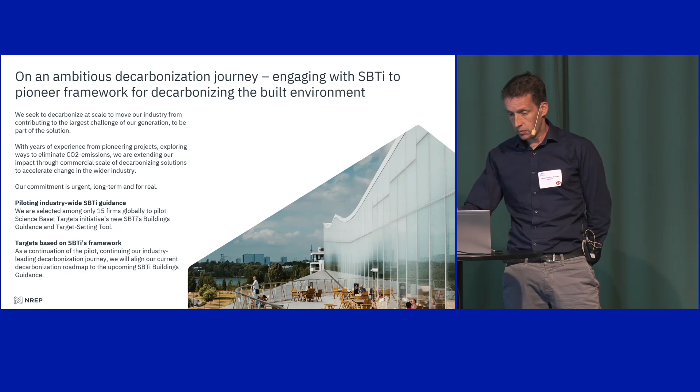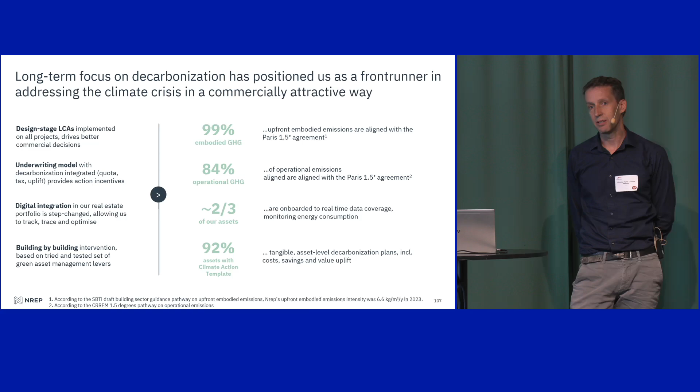We are very ambitious on the decarbonization journey. It's a big thing for the company to be part of decarbonizing the industry and the built environment. We have already set targets for decarbonization of our portfolio, also for where we want to go in the future. We've had a long-term focus on this and done a lot of work, and are still doing a lot of work, to gather data across our portfolio and get insights on how our buildings are being operated and how our development projects are progressing on meeting our targets. That's an ongoing struggle for us to get data across all countries. As you realize, the regulations and legislation across the countries differ a lot, so we're also facing issues in getting all our countries and markets to operate in the same direction - speaking, for example, of doing LCAs.

So where are we on the decarbonization path? We have addressed this - earlier this year we disclosed our first GHG report, going more into detail on where we are going, and we highlighted that most of our emissions are actually coming from the construction of the projects that we are doing. That's a huge challenge for us, and we will continue this work, but it also continues the discussions here that we need to do a lot more in the future - we need to lower the bar and have more work to do on that. So Marcus, that will lead us to some of the challenges that we have when we operate this.

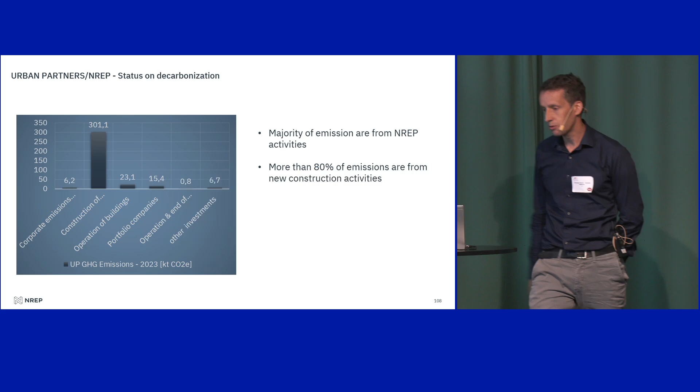Thanks. So some of the challenges we are facing are very similar to the ones we have heard before. I think the analysis done on the Nordic level aligns with our opinion. This is a Sweco report showing the difference using different methodology across Sweden, Finland, Denmark - the outcome from the same building compared. So we're challenged by not being able to compare results across borders.

We might also draw the wrong conclusions and have the wrong solutions based on wrong data. We are also forced to use local consultants who understand the local methodology, and this results in some loss of transparency. We think also higher cost and less efficiency.

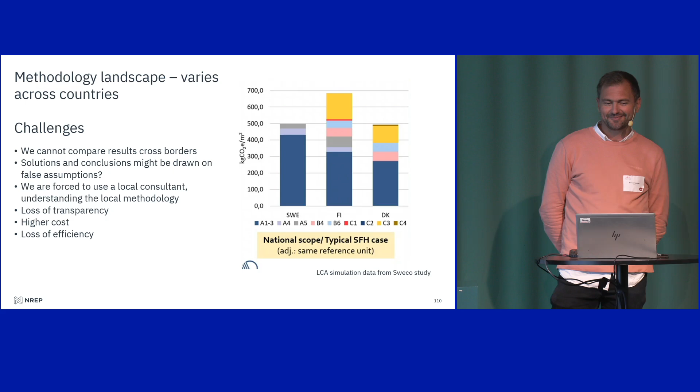So the variables have been mentioned before - we see the same area definitions, building parts included, biogenic CO2, how to calculate that, EPD type, generic versus specific, and also constant EPD improvements among the suppliers. So we need to keep up with fetching the latest EPDs.

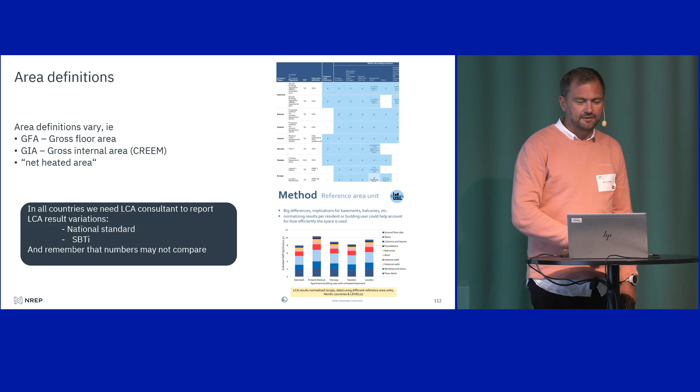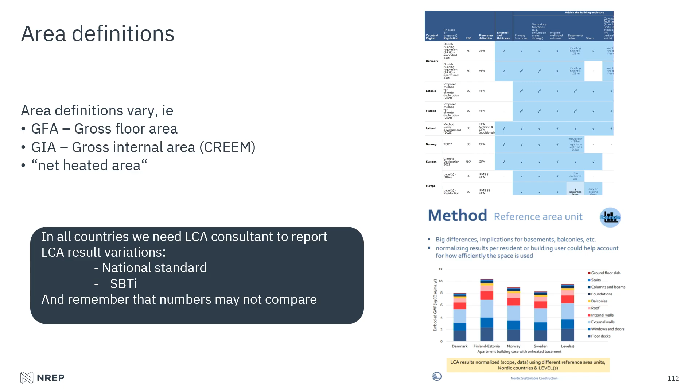Biogenic CO2 we think is quite tricky as well. We hear some countries discussing introducing factors for how to calculate biogenic carbon. Is it a correct assumption to think that all wood is burnt at end of life, or is actually some wood recycled?

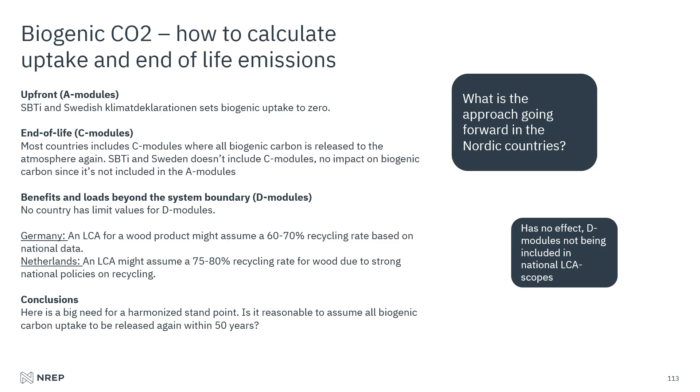I think also to mention the D modules that actually handle the recycling potential - it's not used in any country that we know of. So if it's not in the scope, there will be no drive on this recycling question, we think.

We ask them to redo it and we can supply a list of preferred suppliers that we would like to see in the calculation. But it's like comparing it to a cost calculation - to do a cost calculation for a project on generic data has no value for us. It's the same thing here.

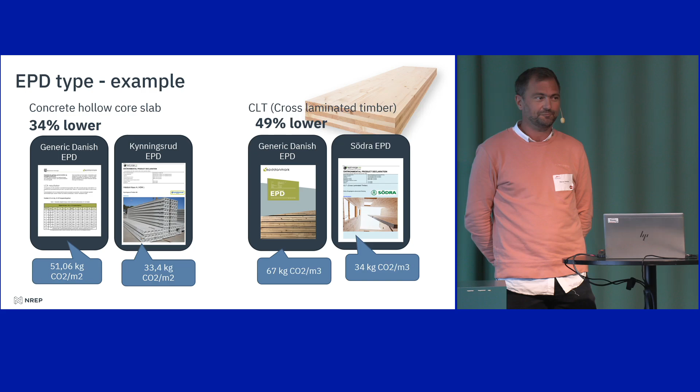And this constant EPD improvement, it's something we call market decarbonization. So even if we are expected to do different things, we need to think maybe more hybrid solutions, but we are also very sure that our suppliers will decarbonize, meaning we will have a market decarbonization without us doing anything.

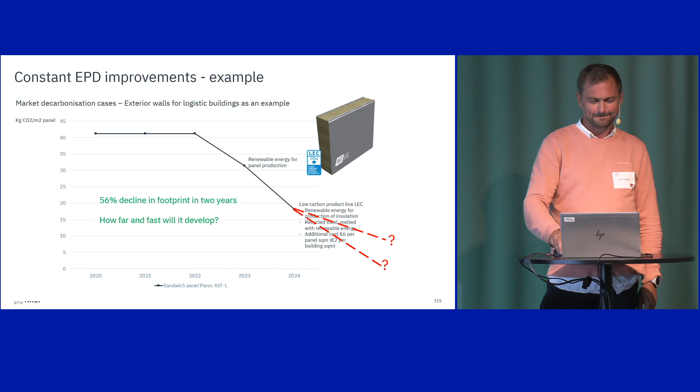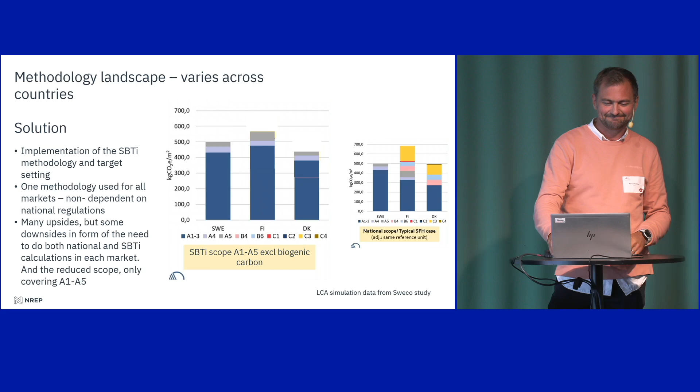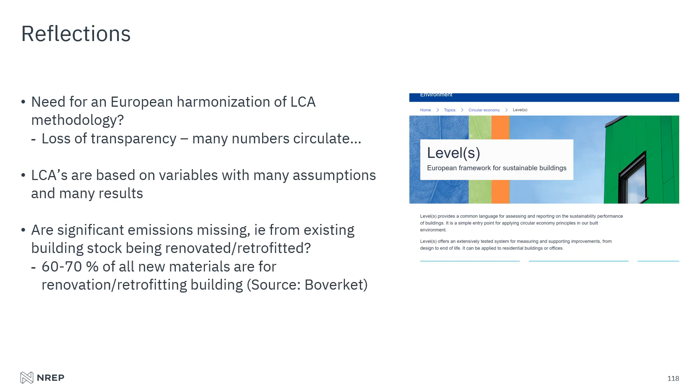But the question for us is then, is that sharp enough to actually drive us where we want to go? We promise our investors to be the leading company in this area.

LCAs are based on variables, many assumptions, many different figures. So in our organization, we face people from Finland and Denmark talking about kilos and having completely different scopes, but they still think it's comparable.

We also, of course, could see that we do a lot of renovations. From the statistics, we can see that 60 to 70% of all material that is produced goes into renovation, and this is out of scope. So we are focusing a lot on new construction of new buildings, but maybe missing out on a very big chunk.

I think that was the last one? I think so, yes. Do you want to add something, Christian? No, it's just a quick comment.

It's very important to realize, as we try when we speak to our colleagues about LCAs and how the methodologies are, that an LCA is based on something like a weather forecast. You can do a weather forecast in many ways, and if you don't like one forecast, you could look at another one. Every day is where we are, and we need to put a big push on this. We also need to harmonize on this, and that's one of our concerns, that we are running in many directions and we can't really compare apples with apples.

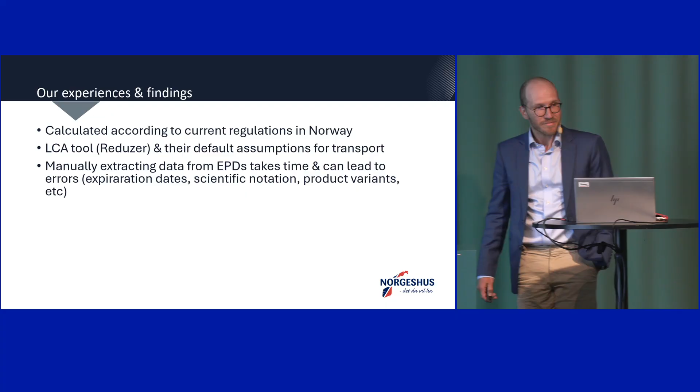Some general experiences from this: it takes time and it can lead to errors. I've been trained in understanding the difference between the various greenhouse global warming potential indicators, but some of my engineer colleagues haven't. As soon as they're confronted with GWP GHG versus GWP fossil versus GWP total, we might as well be speaking Greek. So those are some things to make note of.

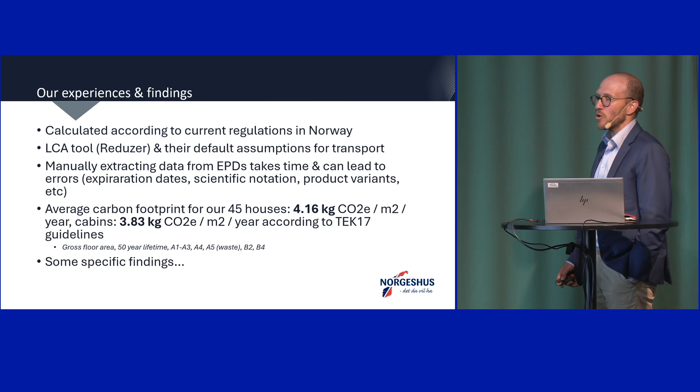A little bit more about some specific findings. But before I go further, one thing about EPDs. There's been good discussion about EPDs, and I agree with NREP and Marcus—we want to use product-specific EPDs to the greatest extent possible.

In these calculations there are about 23,000 different product lines, of which only about 300 are unique products. Among the 23,000 product lines, we had EPDs for about 85%, with 15% generic values. But for individual unique products, which can be used several times, we had about a 65% coverage ratio for EPDs and 35% generic values. Many of these generic values came from the Boverket database.

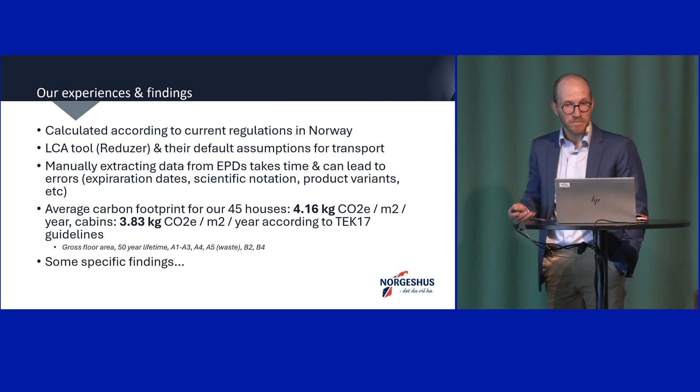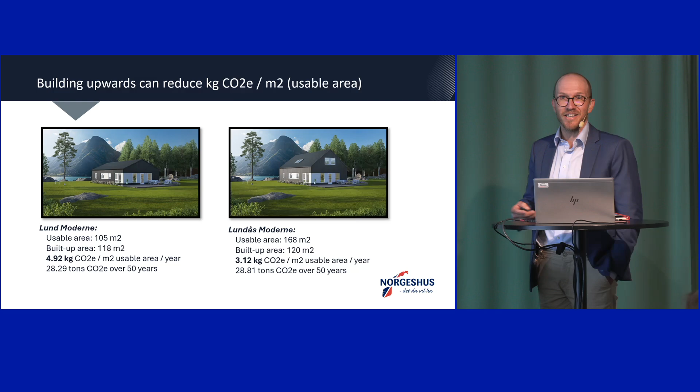Another finding, another model—this has to do with cement again. Here's a model called Fauna, a much smaller house. The usable area is about 70 square meters, built-up area 77 square meters.

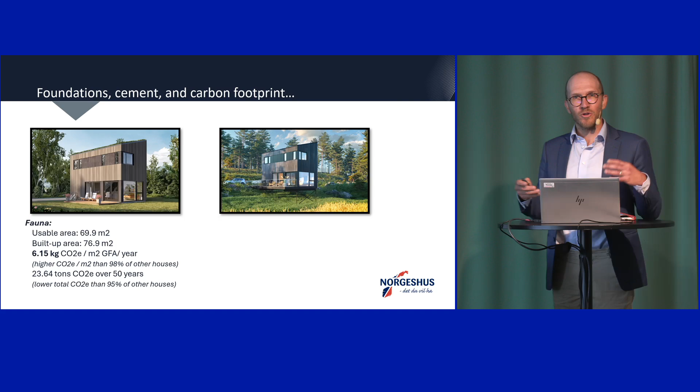This is very interesting. If you look at the total kilograms of CO2 per square meter gross floor area, it comes in a little over 6. When I compare that with the 44 other models in our catalog, it's actually quite high—higher than 98% of the other models. So if I'm a consumer, I'm thinking, this is a 'miljøversting'—in English, this is not a good choice, not an environmentally friendly choice.

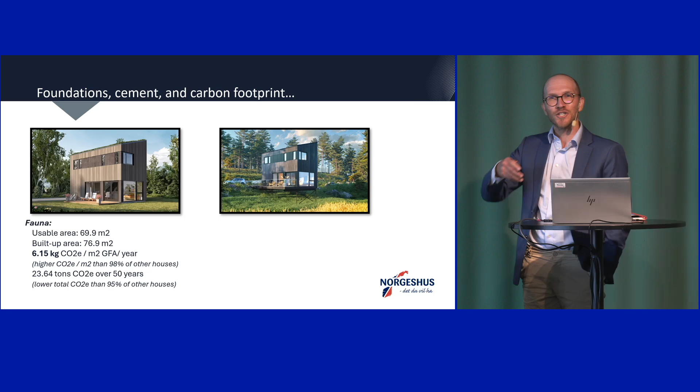But at the same time, if you look at the total footprint, it's about 23 tons of carbon dioxide, which is lower than 95% of the other houses. I thought that was interesting. Then when you look at the same model designed with steel pier foundations instead of concrete, the total carbon footprint goes down across both metrics—per square meter and total tons.

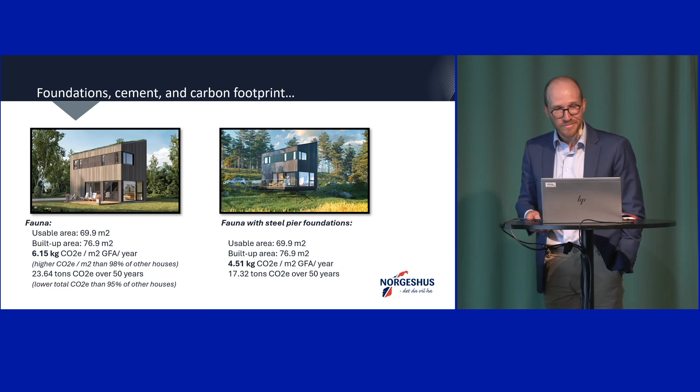So what are the implications? The first thing I want to say—these are my views, and to an extent represent the views of Norgeshus AS, not necessarily the 150 contractors I interact with daily, but some of what I'm going to talk about comes from my experiences interacting with them.

First, obstacles: there is a great amount of inexperience with carbon numbers and what they mean. Even if you ask me, it's like, Ben, can you put into context what 6 kilograms per square meter per year means? Yeah, I might talk about how many flights that is, round trip from here to Trondheim, but still, it's new for many people.

I'll go into it a bit more, but I think the work with, I don't know whether it's 7.2 or 7.5, with some of the coming delegated acts to put these numbers in context of national plans and national goals toward neutrality, will help people understand.

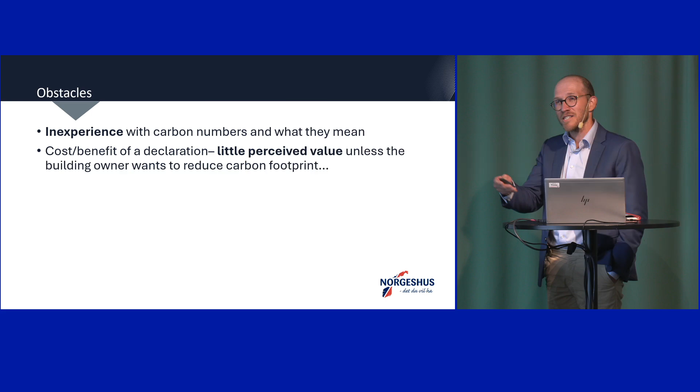Cost benefit of a declaration—there's little perceived value unless you have a building owner who wants to reduce the carbon footprint. For a lot of contractors I speak with, this is just another cost they have to deal with. But if you have an owner who really cares and wants to make better choices, it could be valuable. It's not currently a requirement for all buildings. Our case is a bit different—we wanted to be ahead.

We have the resources to have someone like me look at this stuff. Not everyone does. And then there's biogenic carbon - in Norway we have to do this instantaneous oxidation of biogenic carbon. It leads to a lot of confusion very quickly.

I often see it from certain producers of building supplies - they make certain claims. Often if they have a wood-based product, I'll deal with a contractor, and someone will say, what's a wood-based product? This must have the lowest carbon footprint. But according to how we have to relate to the rules and requirements, that's not the case. There are cases of products in the market that are not wood-based that have a lower carbon footprint due to high recycled content as raw materials.

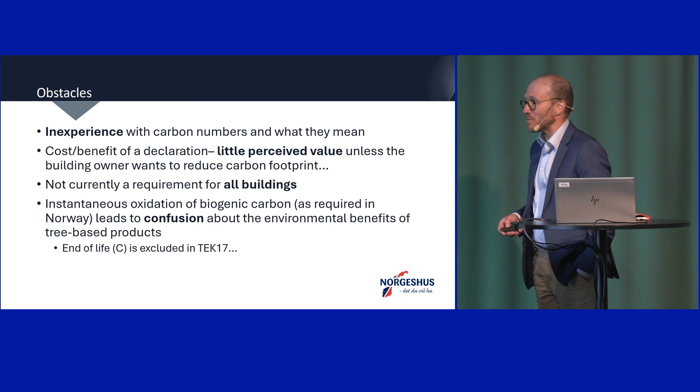What can we do to make it easier for developers and others? I think there's been a lot of effort here, but we need clear nonpartisan signals and commitments about future regulatory requirements so we could plan.

There's been a lot of good work done in this area, a lot of reports through the Nordic Climate Construction Forum Network. So a lot of what I'm going to say, they're not just my thoughts - other really smart people in this room have studied these issues and recommended things. One of these is looking at a bottom-up approach for building stock monitoring. I'm a proponent of that approach when it comes to setting threshold levels. You could read about that in the report, Decarbonization of the Building Stock.

A national database to submit climate declarations in machine-readable format - I think this is necessary to monitor progress over time. And once limit values are in place, I think reporting early in the project planning is important. In Norway, it's just to get the certificate of completion.

But if you have someone that's never dealt with this before and they get a building permit, and along the way they come to us and say, hey, can you guys do a climate declaration, like the building's done in two weeks - when we find out actually it's over the limit, that's kind of a problem. So I saw this idea suggested, and I think it's smart: have it also in an earlier phase, in addition to as-built.

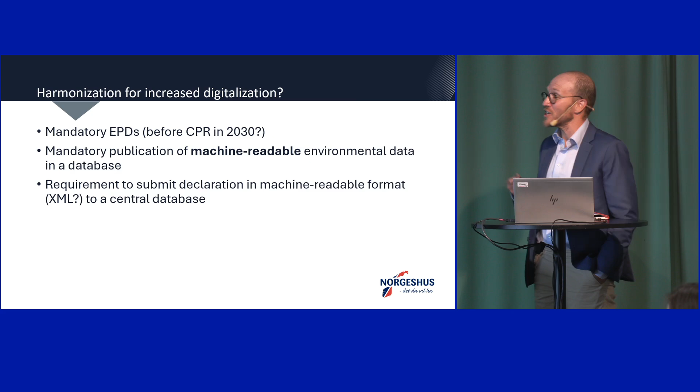And then standardized machine-readable EPDs - harmonization. I'm almost done here. Mandatory EPDs will help for increased digitalization. I'm not totally into the CPR, but if there is some sort of requirement that these EPDs are machine readable, so you don't have people like me reading the PDFs and making a mistake, that's a good thing to do.

A requirement to submit a declaration in a machine readable format, I hope that would be given with a database. And what should be the focus of harmonization? Biogenic carbon and how it influences the results - it's a big deal. The GWP indicator should be harmonized, but it depends upon what we do with biogenic carbon. I'm kind of of the view just to do that so-called zero-zero approach, to make things a lot simpler.

A uniform conservative methodology if you're using generic data - 25%. And that's because I think we need to incentivize building producers to produce product-specific EPDs. Ideally, they should be competing upon the values within their EPDs.

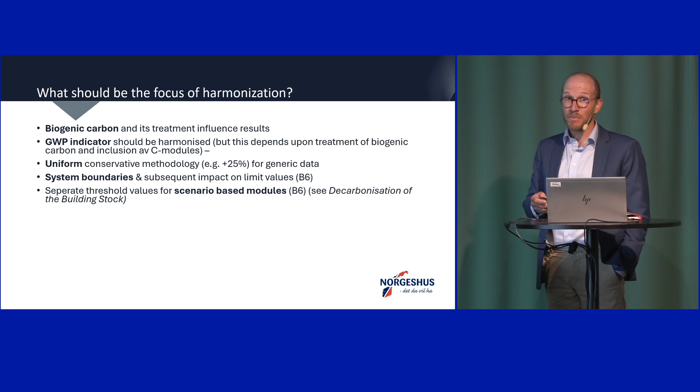System boundaries, very important - we should harmonize on this. B6 is a big deal, it influences the results significantly. A separate threshold was another idea I heard in a webinar a few days ago, for where you have scenario-based modules like B6 - they're scenario-based, you can use different emissions factors on scenarios. Maybe there should be separate threshold values for those, unless there is a standard scenario that everyone has to operate under.

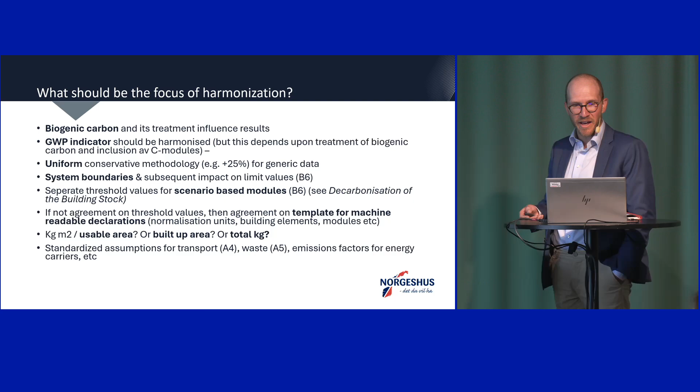If we can't agree upon threshold values, then a template for machine-readable declarations - so over time we can begin to compare stuff as regulations change. And then a bigger question: what's more important here, is it kilograms per usable area, or is the total kilograms something to think about in the broader context of the goals we have? And then standardized assumptions for transport, waste, etcetera, all to help harmonize and enable apples-to-apples comparisons.

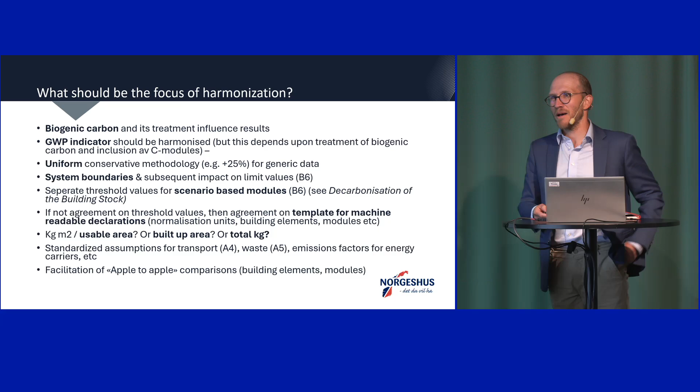Yeah, that's what I had.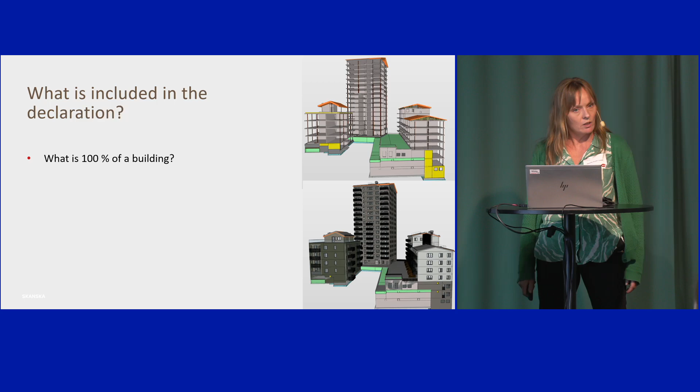So what's included in the declaration? If we say 100% of a building should be included, is it A-model, 100% of the A model? Is it 100% of the construction model? Or is it 100% of the load-bearing structural parts? Do you think we get the same results here?

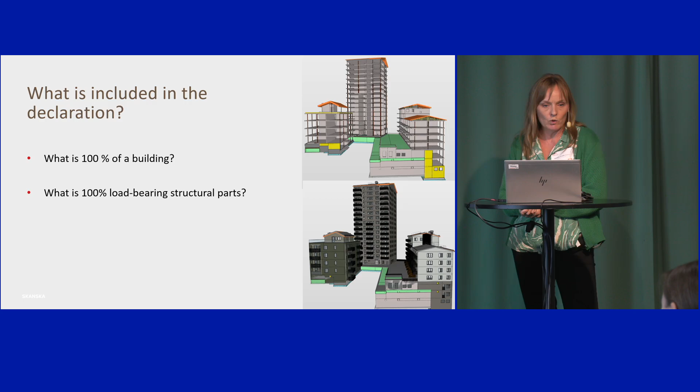And we have to then try to describe what's 100% of the load-bearing structural part, because that's something we have to declare in the climate declaration. And then it comes to, if we have 1 square meter of HDF here, that's the structure part, you know.

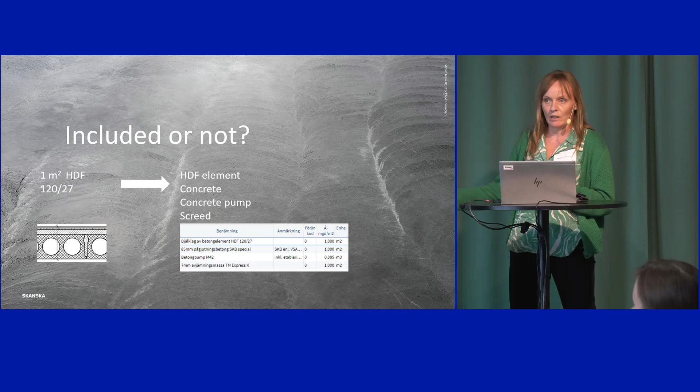And that 1 square meter, you can take it from a model, a quantity takeoff, you have 1 square meter. But if you actually calculate the materials that you need to have the function of this HDF, then you have a lot more materials. You have the concrete, for example. Should this be included or not? I think there are so many details in this.

So you really have to be very, very sure what's the data that you put into the calculation programs. This is just an example. We have a lot of questions, and I think Boverket has done a great job with this handbook that Christina showed. But when you really want to compare, you have to make sure that you have the same input. And that's the real challenge, I think, because it's a lot of data that we have to control and to be able to agree on.

And for Skanska, we have connected this from the cost calculation program. We calculate each and every material that we have to pay for. And we don't pay for just the HDF, we pay for the whole thing, otherwise we can't build the building.

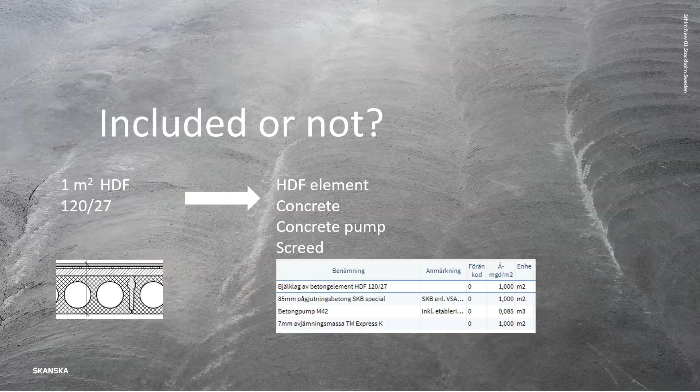And we also do the as-built, because we're not interested in what we actually plan to do, we're interested in the results. I can't see it in any other way. But we do know that there are a lot of changes during the building process and during production, and we have to keep track of all these changes to actually represent the as-built amounts of materials.

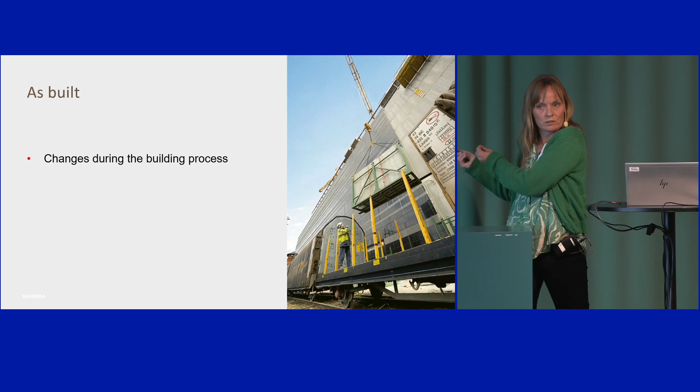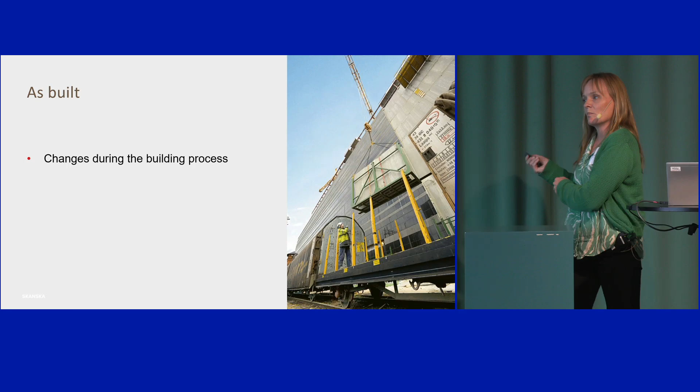And that is not very easy. You think, great, that you know exactly what you used. We follow the costs, we're great at following the costs, but to follow the changes in materials is not always that easy.

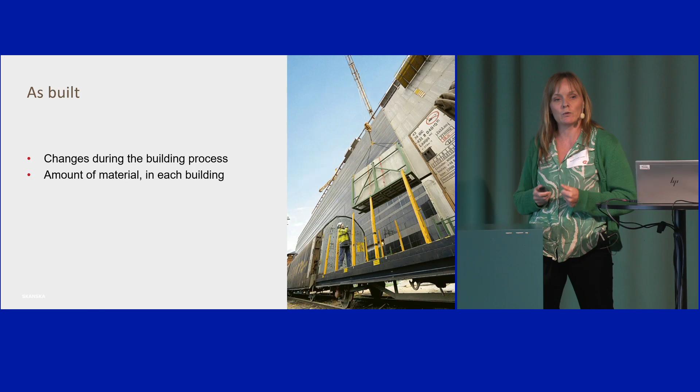We also have to keep track of how much materials we've actually used in a specific building. We might build a big project, maybe 5 buildings, but we do a climate declaration for each building, so we have to keep track of which material belongs to which building, in which building part.

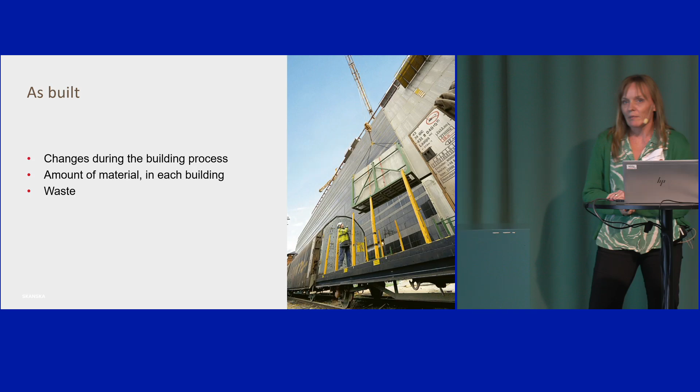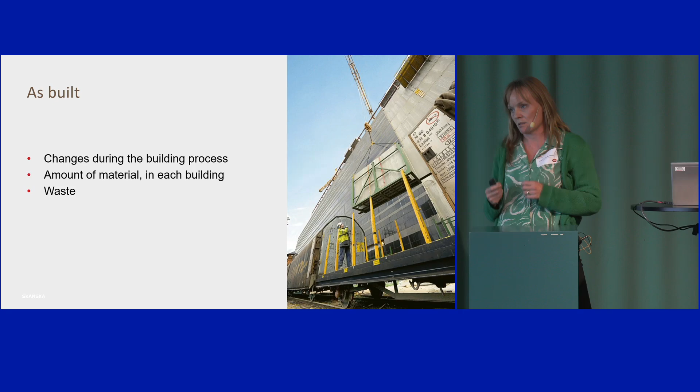Waste. When it comes to waste, we don't measure waste for a specific building part, we measure waste in fractions. You don't have a container for waste for a specific building part, so we can't measure waste per building part. That's not possible.

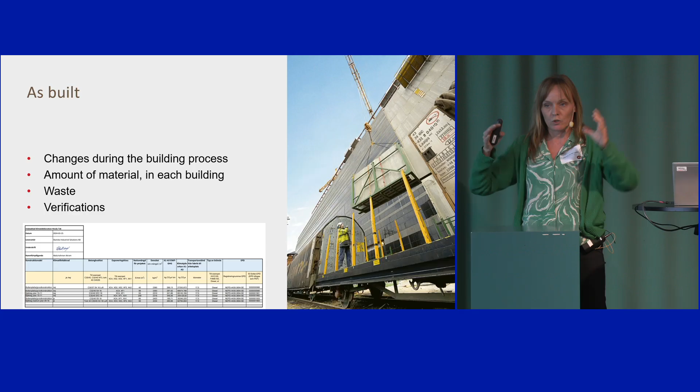And we also have these verifications. We have to have verification on how much materials we actually used. And I think this is great, because we do need to know what kind of materials we bought. But right now, there's a lot of manual work. It's time consuming, I just want you to respect that it's time consuming.

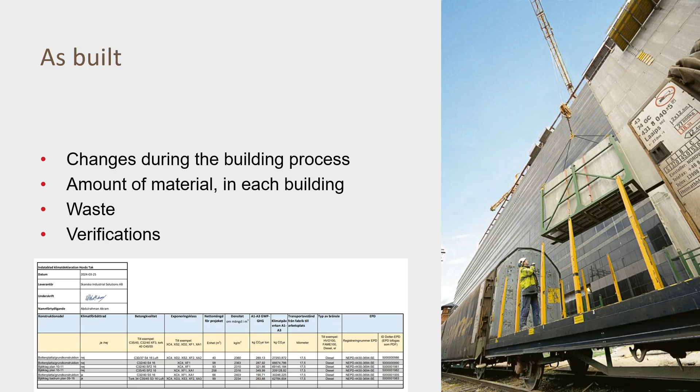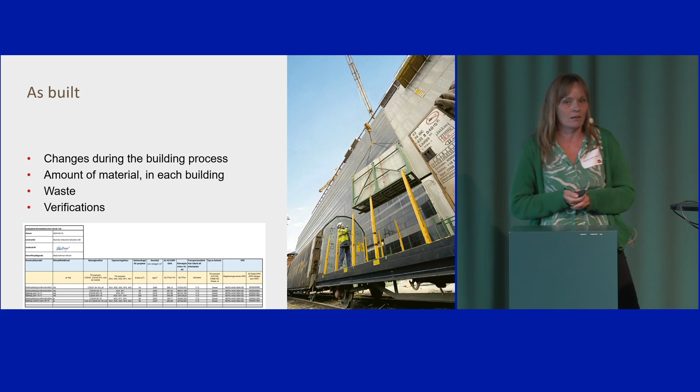It's a lot of data to get this right, and I want you to keep that in mind when you start comparing the figures from Boverket, for example, the statistics for the Swedish climate declaration that Christina presented. To me, that's okay, that's a start, but you shouldn't draw any conclusions from this material yet, because I don't think we've agreed on everything yet. There is a need for competence, of course.

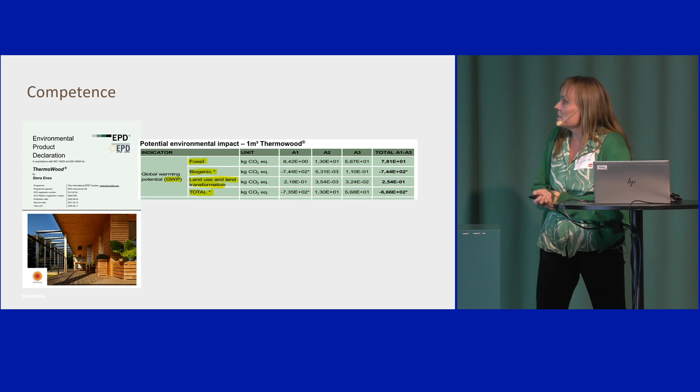We've spoken about the EPDs, and we put this in the hands of our purchasers. You should decide now which supplier you should use, and you really have to know which data you should use here. And they are lost—there are so many mistakes made here. We have to make it easier for them, because we can't have a specialist in each and every decision. So it has to be very clear what the data is here, because the results can be completely different values.

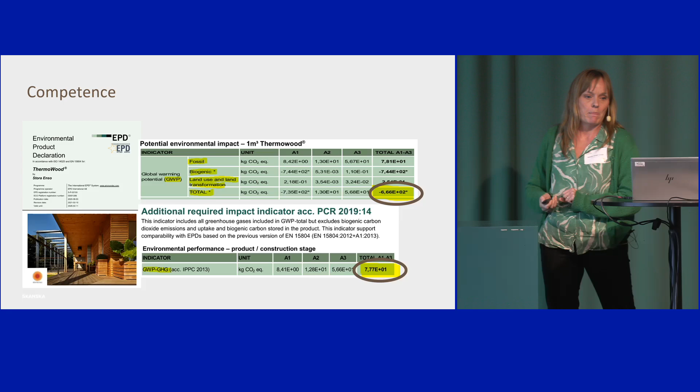But with that said, I think this climate declaration has put climate on everyone's agenda now. It's mandatory, and that's great. And there are some opportunities here, because there are a lot of opportunities.

Digitalization—because we have so much information that we have to gather, we really need the digitalization. And there's a lot of work within our businesses, cooperation to solve this for us in an efficient way. Standardization is really a driving force in digitalization. And that's needed not only for the climate declaration, it's needed for many other reasons. That's why it's a win-win for us. When we work with the climate declaration, we get a lot of other information at the same time, which we actually want. So for us, it's just a driving force.

So there are lots of opportunities here, and new cooperations, which we think is great, because no one can solve this by themselves.

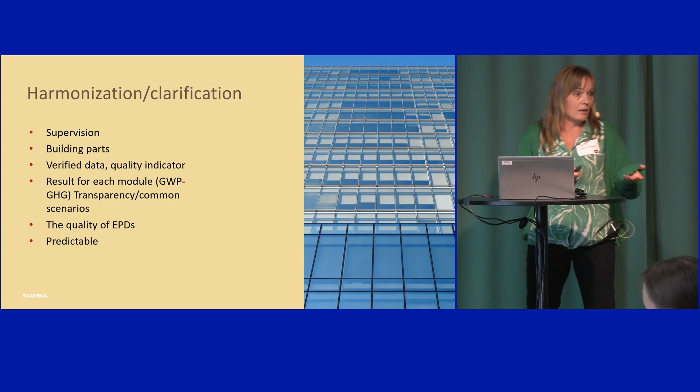And also, it has to be predictable—the roadmaps for developing the regulation—because change in our companies takes a lot of time. Everyone wants to change, but there's a lot of different information we have to connect to each other. The digitalization process takes a lot of investment and time, so you have to respect that, I think.

And you haven't given me the sign yet. Yeah, you did—sorry. Because that's all for me.

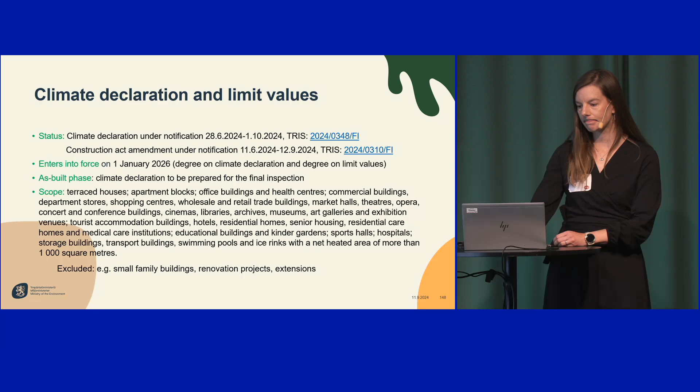What is in the climate declaration? In Finland we have included two separate topics or calculation themes: carbon footprint and carbon handprint. Somebody mentioned module D - this is not really module D in the life cycle assessment calculation, but you can take that as inspiration for our carbon handprint.

In our life cycle assessment, we calculate the A1 to A5 modules, so the whole upfront emissions are calculated and included. We have also integrated Module B4, replacement of products during the life cycle, and also the energy usage of the building, the B6 phase. And the C module, the end of life of the building, is included in the life cycle assessment. Then we have the potential climate benefits of the construction project, the carbon handprint.

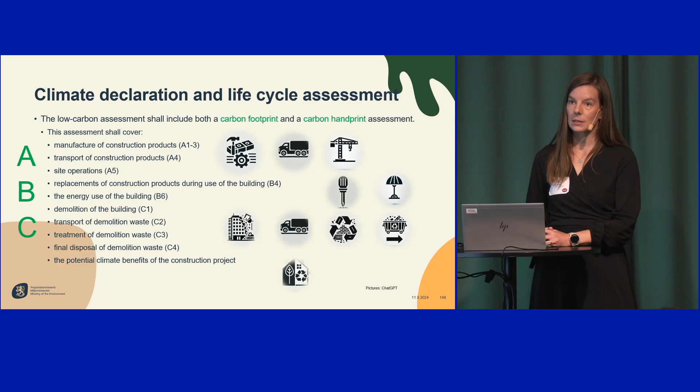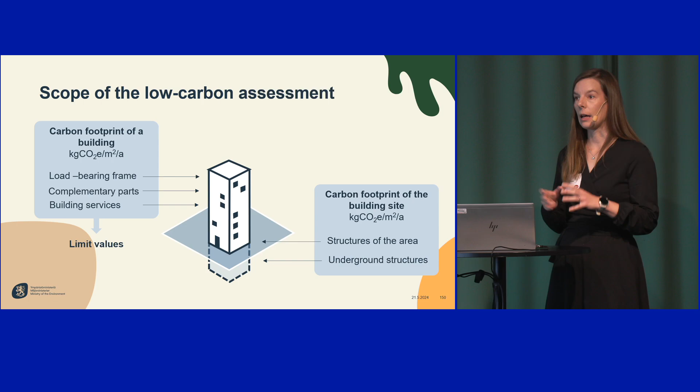Scope of the low carbon assessment: we do it for the building, and we do it for the construction area, so two separate calculations. The limiting value that will be given affects only the building - we talk about the load-bearing frame, complementary parts, and building services. The building area, or building site, concerns the structures of the area and underground structures, and no limiting value is given for the building site.

About the carbon handprint, we have different components included: reuse, recycling, surplus renewable energy, carbon storage, and carbonation. These are not summed together - they are presented as separate parts, and they are not aggregated from the carbon footprint.

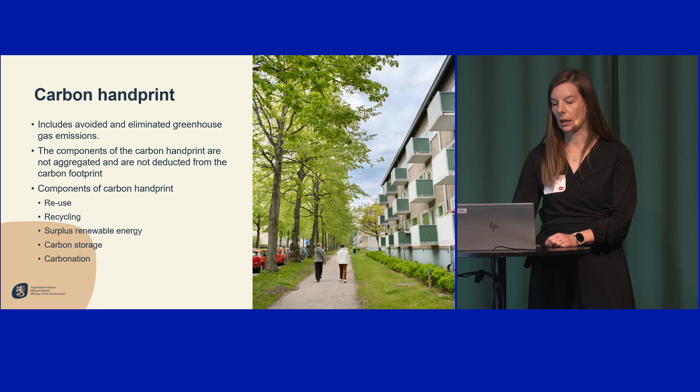Deducted from the carbon footprint. And currently, we are working to draft a decree on limiting values. We will set the limiting values for each category of intended use of buildings. So, for example, apartment buildings will have different limiting values than a hospital, for example.

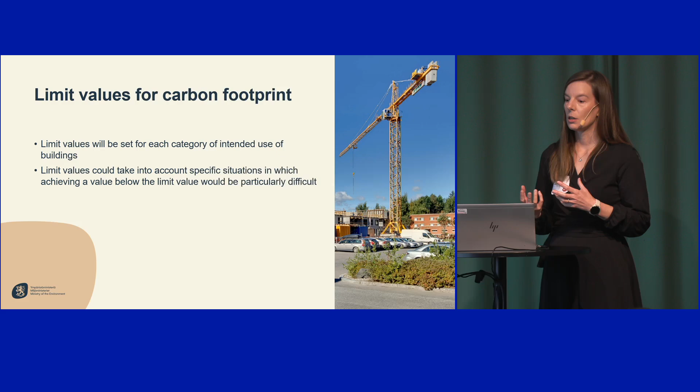And when setting the limiting values, we can take into account the specific situation in which achieving the limiting value would be particularly difficult. For example, the area, or if there are some stricter regulations towards fire safety and that kind of situations.

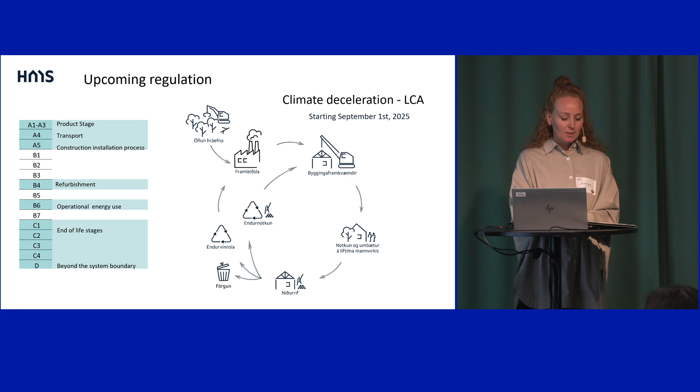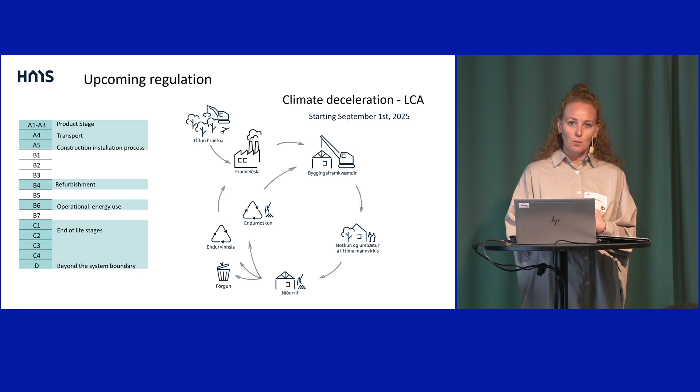The phases marked in green are the ones we are specifically asking for. After the initial implementation, we plan to introduce specific limit values for carbon emissions by 2028, based on the data collected during the first few years.

LCA submissions will be required at both design stage and final stage. This two-step process ensures that sustainability goals are set early in the project and monitored throughout its life cycle.

We've developed an LCA submission portal where project owners and designers submit their LCA documentation, including details about the structure. We also ask users to specify which software they used for their LCA. While the choice of software is flexible, this information helps ensure compatibility and accuracy in the submissions.

The results of the LCA must be broken down by phases, providing a comprehensive view of the building's environmental impact, and supporting documentation should also be submitted.

We provide Icelandic average values for use in different LCA phases, and these averages help guide LCA calculations when specific data isn't available. The values cover key phases like technical system, transport, construction, and end of life, along with emission factors for energy use.

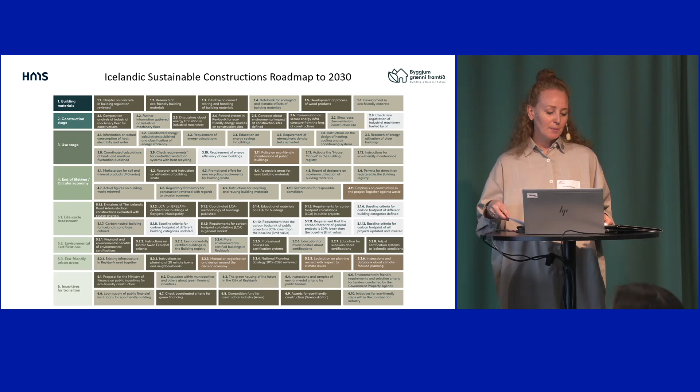In conclusion, the upcoming LCA regulation and our commitment to a circular economy are key components of our sustainability efforts, and these are part of our Icelandic Sustainable Construction Roadmap to 2030.

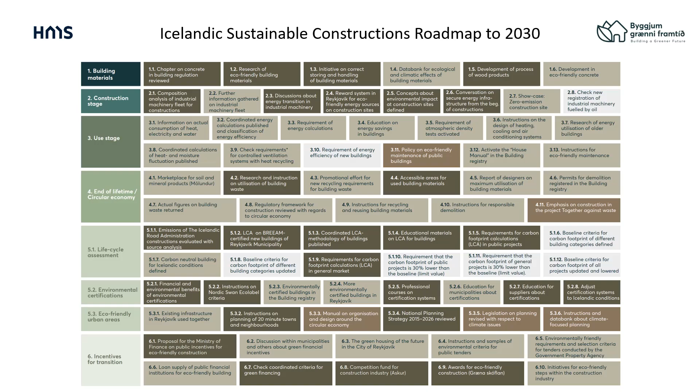The roadmap outlines 74 actions aimed at reducing emissions and waste across 6 categories, and so far 33 actions have been completed. We are on track to update it by the end of the year, adding new actions aligned with upcoming EU policies to address emerging challenges.

In closing, I want to extend our thanks to our Nordic partners, and thank you for your attention.